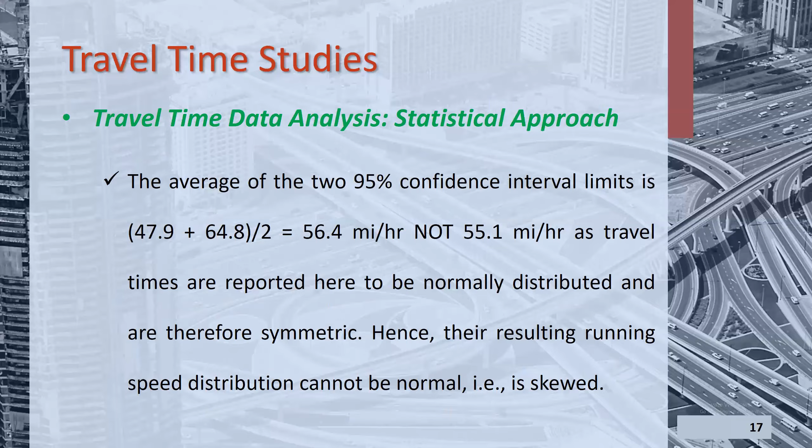So we have already finished travel time study. Today we'll be starting with delay. So what is delay? Delay is a portion of the total travel time that is particularly not liked by the traveler.

When you are traveling, you actually don't find it bothering. But whenever you have to stop, you feel annoyance, and that part is called delay. Delay actually has very high importance in transportation planning.

For example, if you want to go from A to B using route 1, maybe route 1 takes 40 minutes, and there's route 2 which takes 30 minutes. But in case of route 1, you don't have to stop, you can go very smoothly. In case of route 2, it takes around 30 minutes, but maybe the actual travel time is like 10 minutes, and 20 minutes is actually spent on delay.

Many times you will see people traveling using route 1, because that gives them an uninterrupted travel. Even in my case, traveling from IUT to Uttara has become better now. But previously, when construction works were going on, many times I used to take the route through Kamarpara, then come to Uttara sector 10, and that way I used to come up to the airport.

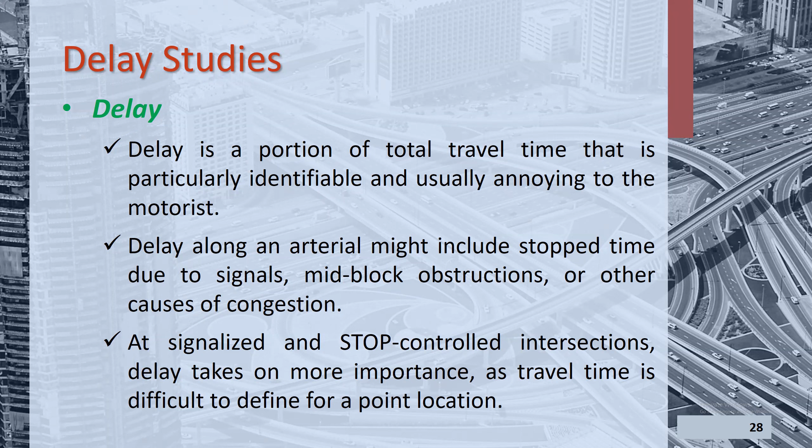So at signalized and stop control intersections, delay takes on more importance, as travel time is difficult to define for a point location. In general, when we do the travel time study, it's for the network or for a long corridor. Delay is actually at a specific point, which is why it's very important to identify the points where we are losing a lot of time.

In case of intersection delay, the other kinds of delays are either easier or very difficult to solve. For example, if you have very high demand and the delay is because of that, the solution is not easy - you have to do a massive investment for that. Or if it's because of illegal parking or something like that, you can easily solve it. But there's one delay which definitely you can do something about, and that is called intersection delay.

Be it because there's a stop sign or because there's a signal - when we talk about intersection delay, there are many different definitions. In old ages, we used to use one definition; these days we are using some other definitions. So let's go through all those delay definitions. The first one is stopped time delay.

This is actually the most common one that used to be used say like 2-3 decades back, and it is the easiest to calculate. You just calculate the amount of time the vehicles are remaining completely standstill because of intersection has signal or intersection has a stop sign. But these days we don't really use this one, but this is the easiest to measure.

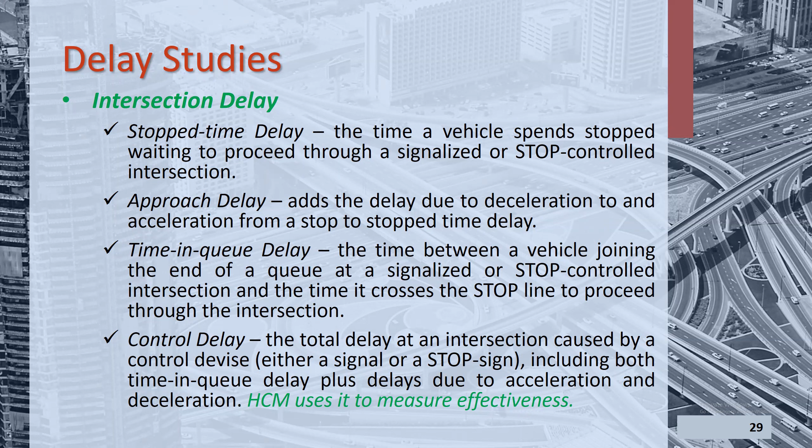Every time the way we start is like, first we learn the definition, then we learn why we need it. I think we have covered these two points. The third thing is how do we design the survey to actually collect this data, and the fourth one is how we analyze and interpret the result. So let's move on to the remaining two parts.

That was intersection delay, and now we also have delay along the route, which is easier to resolve. It is the difference between the actual travel time traversing a section of highway and the driver's expected or desired travel time. So if there is no traffic, if you directly drive, how many minutes do you need? And then when there is traffic, how many minutes do you need? The difference is actually your travel time delay along the route.

So along the route, there can be intersections, so you have to calculate the intersection delay and the delay not caused by intersection separately. And when you add all those things together, you actually get the delay along the route. And you also have it recorded because you have the overall travel time to traverse that section.

So normally delay calculation methodology is loosely defined. When we are collecting data, except for intersection data, when we are collecting data for travel time study, from that we actually can gather the information regarding delay as well. And it is seldom used for assessing congestion along a highway segment. Some types of delays are measured as part of travel time study, as we have explained before, by noting the location and duration of stop periods during a test run. So then we can clearly understand where are the locations we are losing time and how much time we are losing. While speeds are generally studied at a point under consideration of free flow, travel time and delay are generally studied along sections of roadway under congested conditions. We have also discussed this issue during our last lecture.

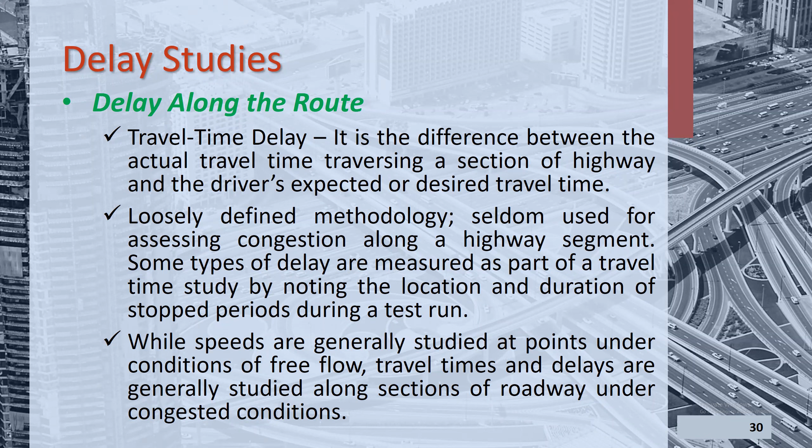When calculating delay along the route, before 1997, stopped delay used to be the most preferred measure. But as I've told you, for the last 3 decades we are not using it anymore, at least in situations when we have more information.

Now, total control delay, defined as the time in queue delay plus time lost due to deceleration from and acceleration to the ambient speed, is these days used and recommended by the Highway Capacity Manual. Total control delay methodology is based on direct observation of vehicles in queue at frequent intervals and requires a minimum of 2 observers. We will see how we can distribute the responsibilities of these 2 observers.

Before we move into how to collect data or design a survey for intersection delay calculation, we need to know one more term called saturation flow rate. Why do we need to learn this term? Because the intersection delay methodology we will study now can only be applied when the intersection has not reached its saturation flow rate. When it's lower than that, we can do this study. If it is at that level, we cannot do this study anymore.

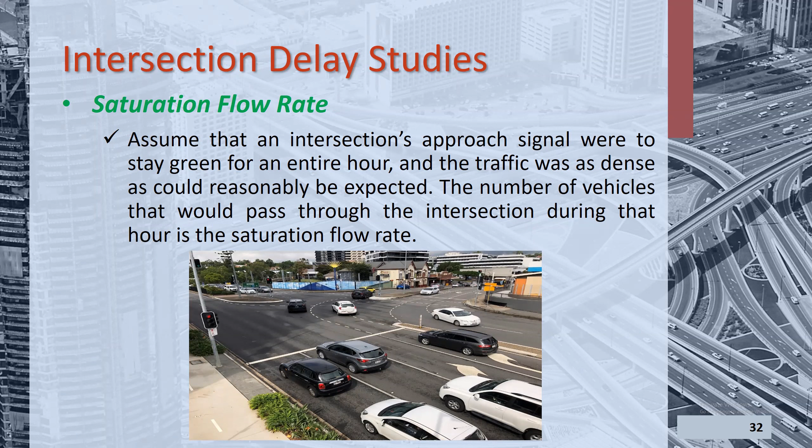Saturation flow rate is more like a capacity kind of thing. So when there is no control at an intersection and you have very high volume operating there, the maximum number of vehicles that can pass that intersection is actually your saturation flow rate. Normally when the intersection reaches saturation flow rate, we actually don't do delay study anymore. It has to be done before that.

Some important points when calculating total control delay: it is intended for unsaturated flow conditions, and for cases where maximum queue is about 20 to 25 vehicles. If you have a queue over 20 to 25 vehicle lengths, then again you cannot do this intersection delay study. It means the intersection is already in bad shape.

The method does not directly measure acceleration and deceleration, but we have to account for them, right? So you will see there are some empirical charts and terminologies that we multiply with the value we've calculated, or we add some extra values to it. That's the way we actually accommodate the acceleration and deceleration delay.

We also need to know the free flow speed at the beginning of the detailed survey. How can you do it? You can just drive through that intersection, assuming during a green signal when traffic is not heavy, or if it's a stop control, find a space when there's no vehicle in the intersection and just drive through. That is your free flow speed, and you have to take that data because we will use it in the calculation of total control delay.

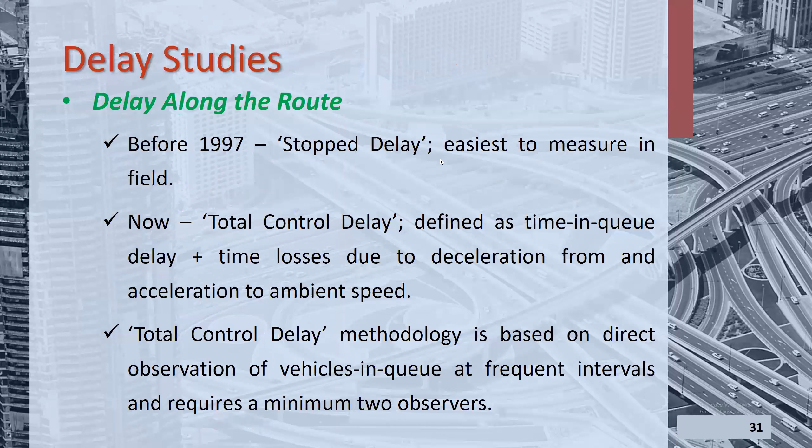Then survey count interval, like every X seconds you enter the data. Remember for our traffic volume count, it was every 5 minutes or 15 minutes. So here also you write it down, normally in seconds. Cycle length is from one red to another red - how much time we allocate. That is called cycle length.

Stopped vehicle count: how many vehicles have stopped. If it stops multiple times, you count it only once. So how many vehicles have encountered this intersection and stopped at least once - that's the V stop. And then VT is how many vehicles have arrived so far at the intersection.

Now we have the clock time - say, for example, 8:30, 8:31, 8:32, something like that. And cycle number is like one red to another red - one cycle can span several minutes. So you write down the cycle numbers, and even those cycle numbers you divide into smaller parts, like every 10 or 15 seconds.

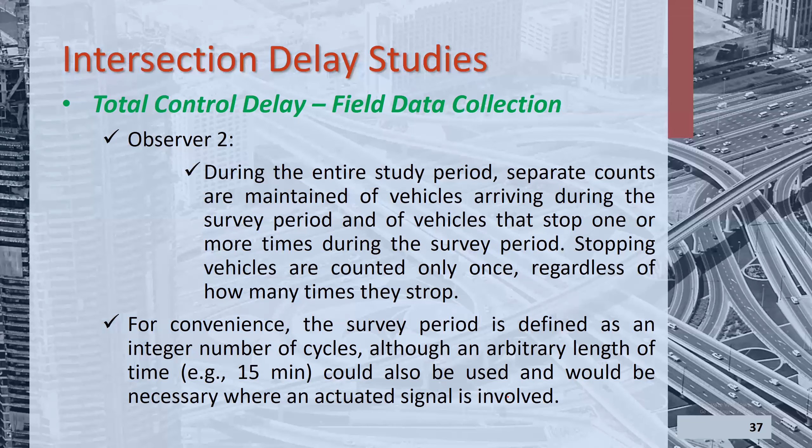Observer 2 separately keeps counting the number of vehicles arriving and the total number of stopped vehicles. So these are the works of observer 2. Sometimes you may need more than one observer for observer 1's work, but observer 2's task should be fairly simple for one person.

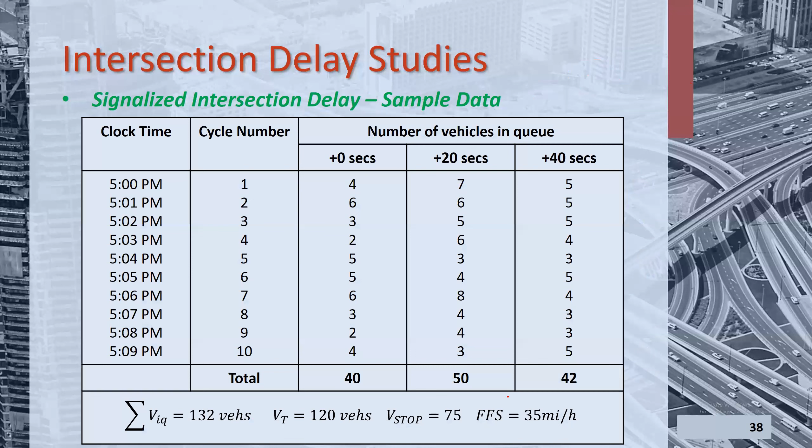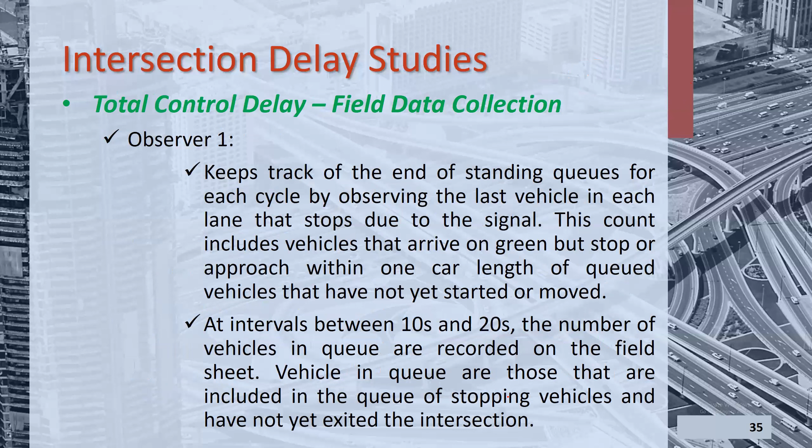Now you fill it up this way. Now, how to calculate the average time - total intersection delay. First, you calculate average time in queue, TQ, measured as IS. IS you already know, the count interval. Here, if it is 1 minute and 10 divisions, so it's 6 seconds. In our case, it is like 20 seconds.

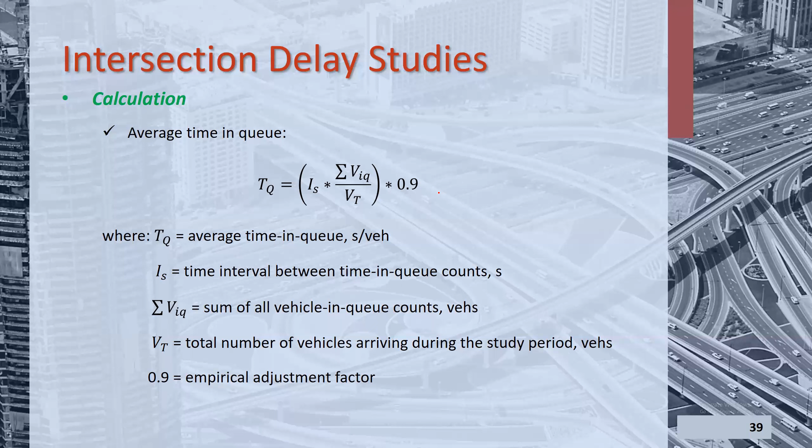Summation of VIQ, you already know, VT you know, and you multiply it with 0.9. Why do we multiply it with 0.9? Because in many cases we have seen the VIQ value becomes very big and we actually overestimate the time someone spends in the queue. So that's why we multiply it with 0.9. So you can calculate TQ from this.

But then we need to calculate two more things. One is called VSLC, which is the number of vehicles stopped per lane per cycle length. NC is total number of cycles - in this place, we have 10 cycles, so NC is 10. NL is number of lanes - you will know whether you have 2 lanes or 3 lanes or 1 lane.

And V-stop is the total number of vehicles that stopped at least once. But if it stops multiple times, we still count it as one. So from that, we can easily calculate VSLC.

And FVS is actually fraction of vehicles stopping - other variables as previous, stopping. So total VT is the total number of vehicles that have arrived, and V-stop is the total number of vehicles that have stopped at least once. So we get the fraction of vehicles that actually have to stop.

And using that, if you know the free flow speed and vehicle stopping per lane per cycle, you can actually get a number like this. And you will see how we use it for the calculation of the total delay.

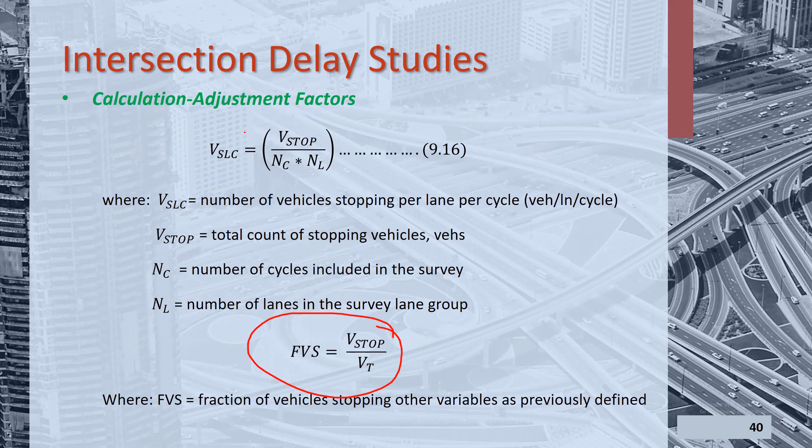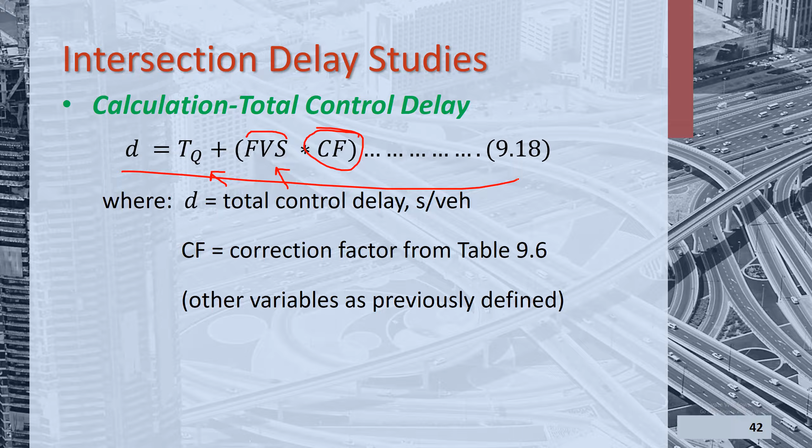Yes sir. So now we will move to the next part.

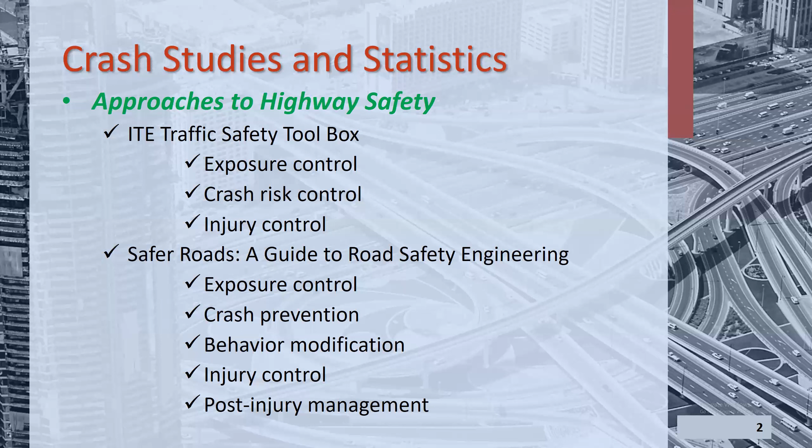Now crash risk control is divided into two parts in the Safer Roads guideline. One is crash prevention - you want to prevent as many crashes as possible by modifying the behavior of people, because most of the time crashes happen due to attitude, behavior, knowledge about safety, reckless driving habits, drunk driving, not following rules, or not using seat belts. So behavior modification is also an important factor.

So now the purpose of crash data collection. First we have learned the two guidelines we follow to control or reduce the impact of crashes. Now, second thing is, why do we need to collect crash data?

We need to collect crash data to identify locations where usually a high number of crashes occur - we call them hotspots or black spots. If we don't have the data, how can we understand whether a lot of crashes are happening in a place or not, and whether it is actually significantly more than crashes happening in other parts of the network? We will answer these questions as we move on in today's lecture.

The second point is detailed functional evaluation of high crash locations to determine contributing causes of crashes. If we have crash data, we can identify where many crashes are happening, and also understand why these crashes are happening - what are the contributing factors.

Third is development of general statistical measures of various crash-related factors to give insight into general trends, common causal factors, driver profiles, and others. For example, whether crashes are increasing or decreasing, or if it has any relationship with changes we have made, what are the most common causes of crashes, and what kinds of drivers are most commonly involved.

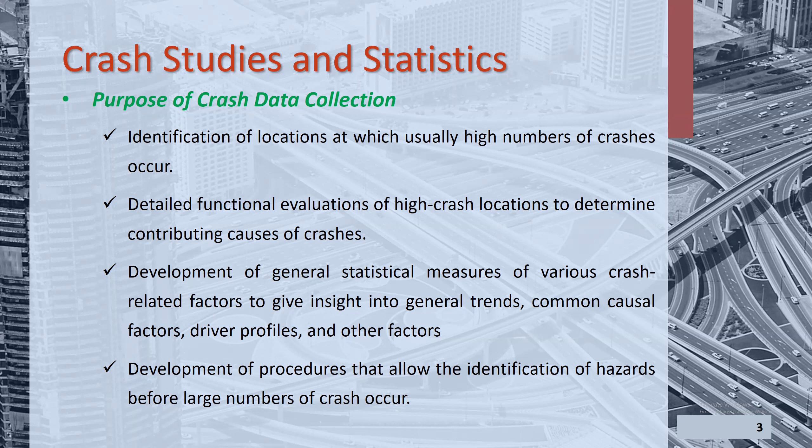So when you design something new, you can take care of those issues so that your new design doesn't come up with the same problems. Or you can check the design of existing roads, we call it road safety auditing, and actually improve things. So these are the 4 reasons why we need to collect crash data. Do you understand why we collect crash data? And I believe you also understand the philosophy of the 2 guidelines.

Now, how will you know that a crash has happened? This is one of the most important questions. The first one is motorists' crash reports. If someone is traveling on the road and sees a crash happening, they can report it. In our case, we have 999. If someone sees a crash, they can report it through 999. This is filled by each involved motorist in the road crash, required for all crashes with injuries, fatalities, or property damage exceeding a prescribed limit. So normally we expect that whenever someone sees a crash, that person will report it, in our case to 999.

Another thing is when police get notified, either through motorists or someone else calling, then police need to go to the site and fill up a detailed form. In Bangladesh, we call it ARF, Accident Reporting Form, and it has 54 pieces of information. That's why most of the time they don't really fill it up. It's normally filled up by an attending police officer for all crashes at which an officer is present. Whenever a police officer is present and sees a crash, that must be noted. Or if they get notified of a fatal crash or serious injuries where emergency vehicles had to be sent, or a lot of property got damaged, then police must go to those places and collect those reports.

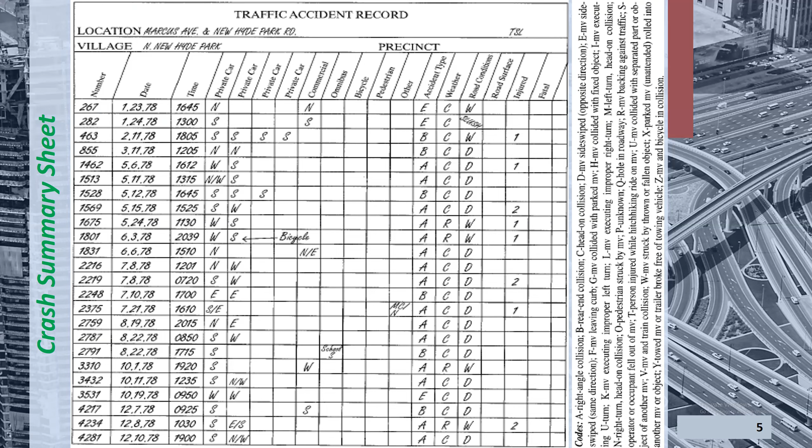Now we clearly understand that it cannot be something paper-based. These days we have software in which we can keep this data. For example, there are two very popular software for these things: one is called iMAAP, and another is called Driver. IMAP is a commercial off-the-shelf solution, COTS - you have to buy it from a company. If you want to learn more, you can search IMAP, it's made by TRL software. I gave them a lot of suggestions on how this software should be constructed, and I am responsible for implementing IMAP in the Dhaka-Sylhet corridor for a project that IUT is doing, so I am directly and heavily involved in it. The Bangladesh government is buying this software to collect crash data on the Dhaka-Sylhet corridor, and is planning to procure a crash data management system for the whole network within the next 3 years.

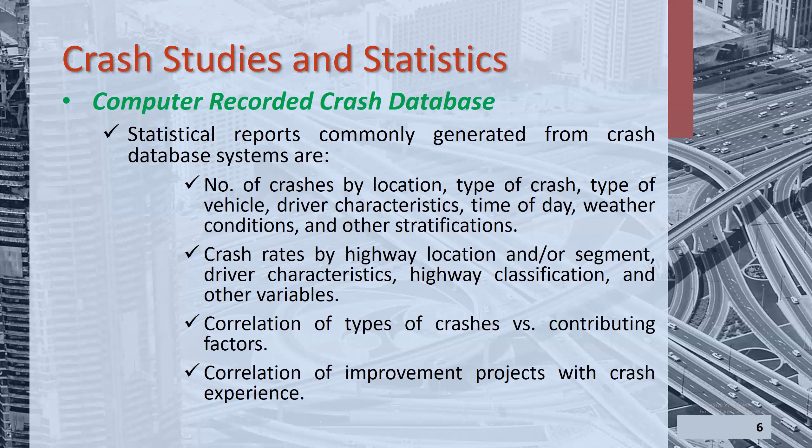Correlation of improvement projects with crash experience. If we have the crash database and we've improved some things in the road, and after that the crash database is suggesting the situation has improved or gone worse, we can actually relate project with crashes - these kinds of projects will increase crashes, these kinds of projects will reduce crashes, something like that. And the types of statistics that we generate can be divided into three parts.

One is crash occurrence - numbers and types of crashes that occur, which are often described in terms of rates, for example population or vehicle miles traveled. We'll look into this within a very few slides. Then crash involvement - number and types of vehicles or drivers involved, which we can also represent with population or various other kinds of indicators.

Then crash severity. So one is crash occurrence, whether a crash has occurred or not. Second is crash involvement, what type of crashes, what vehicles were involved. And third is severity - how many people died, how many people got seriously injured, things like this.

Now, common types of crash analysis - the kinds of reports we generate regularly. One is trend over time, whether the number of crashes is increasing or decreasing. Stratification by highway type and geometric element - for example, divided highway, undivided highway. Then functional class - national highway, regional highway, or paved highway, unpaved highway.

Stratification by driver characteristics - whether male or female drivers are having more crashes, what particular age group is heavily involved in crashes. We can sometimes see a lot of illegal drivers, or old people having a lot of accidents, or very young people at the early ages of their driving having a lot of accidents. We can identify these trends and then do something about it.

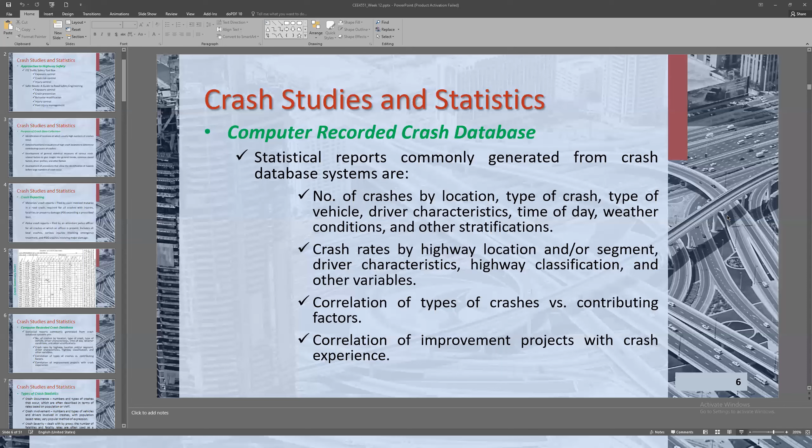Actually, there is something called IRAP, International Road Assessment Program. After your undergraduation is complete, you can go there, take a training and get accredited, and then you will get a certificate of IRAP. For the next 1 year, you can actually rate the roads, whether this road is safe or unsafe - it's called star rating. 5-star road, 3-star road, 2-star road.

Normally our target is to make all the roads at least 3-star, all the national highways at least 3-star. So there you can see, if you change the weather condition, if you change the geometric condition, the crash risk increases or decreases for different roads.

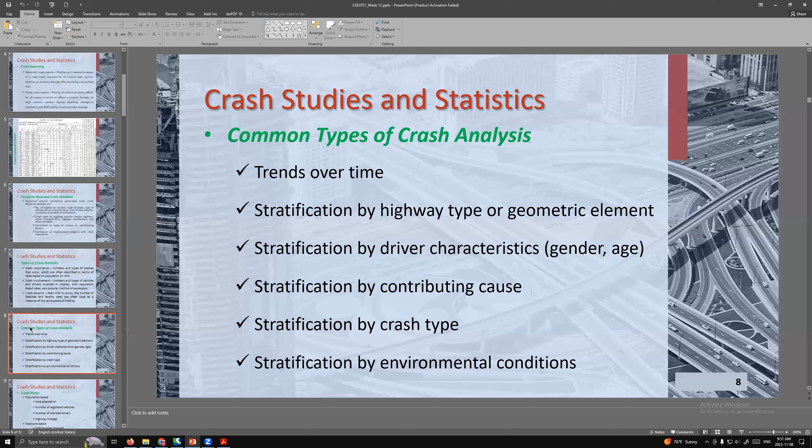So up to now, do you have any questions from the first 7 slides?

No questions? Okay, then now you will be doing some mathematics, like calculating the crash rate. You can do the calculation based on two things. One is called population based, another one is called exposure based.

Exposure based is always a better option because as much as you get exposed, your crash risk increases. If you stay for a long time on the road, then your crash risk will increase. If you travel a lot of kilometers, then your crash risk will increase. So this is exposure based.

Population based is more like static: area population, number of registered vehicles, number of licensed drivers, highway mileage. Even if you have a lot of registered vehicles, if people don't drive but still have a lot of accidents, actually the rate will be low, but it's a very dangerous situation, right?

If you have a huge population like Bangladesh, but we don't have a lot of roads or vehicles, we may not have a lot of accidents happening compared to a developed country. So population wise, it will look small. But actually, if you see, we drive very little, we have very few roads, but still we have so many accidents. So population based will say it's not a serious case, but exposure based will say it is actually serious. That's why exposure based crash rates are more acceptable, but it is obviously harder to obtain.

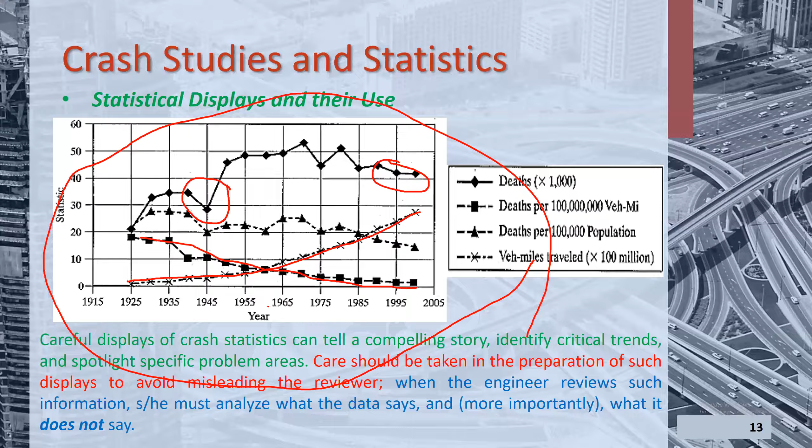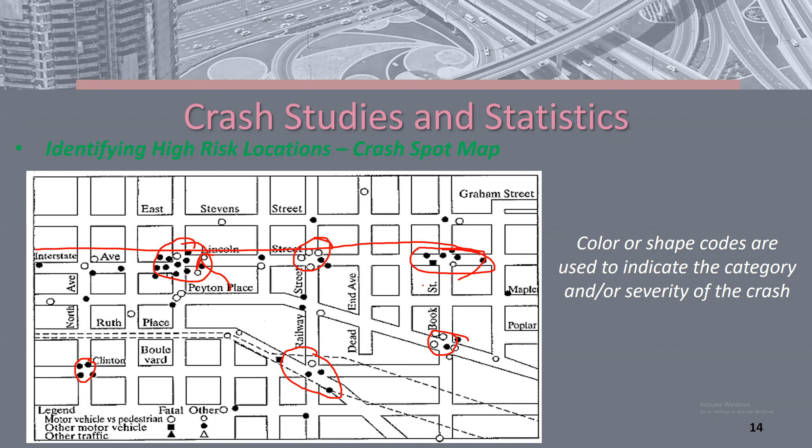So we actually can identify the hotspots. I'll be going to these 1, 2, 3, 4, 5, 6 sites and seeing why these accidents are happening. Particularly this one, I definitely need to go, and this one as well, not this one, maybe. This one is also very dangerous because of lots of vehicle versus pedestrian incidents. So something has to be improved throughout this corridor. We can clearly see.

How can you say that this location is high crash risk? Again, statistics comes in. You have to find a way to show this location is significantly more accident-prone compared to other parts of the network, and to do that we use statistical tests.

What we do is calculate the Z value. X1 is the accident rate at the location under consideration, meaning this location has significantly more crashes than others. We calculate X1, the number of accidents at that location, minus X bar, the average number of accidents at other 4-leg intersections, divided by the standard deviation of accidents at those other intersections.

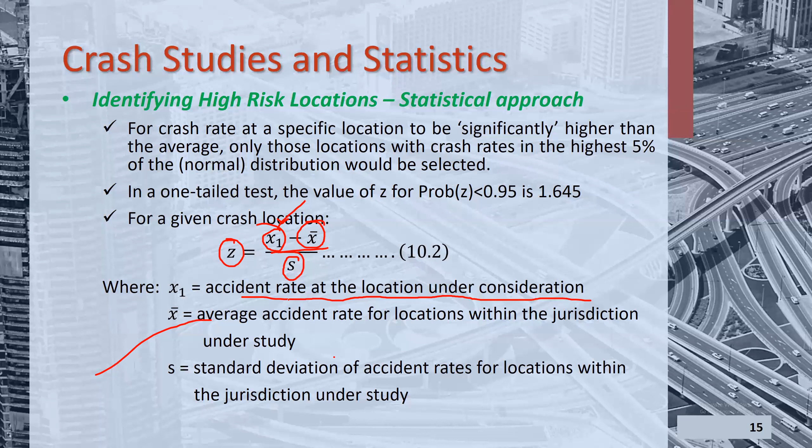From the Z value, we can say the minimum crash rate considered significantly higher than average is found by multiplying 1.645 by the standard deviation and adding the average. If this value is smaller than the observed rate, X1 can be termed a high-risk location.

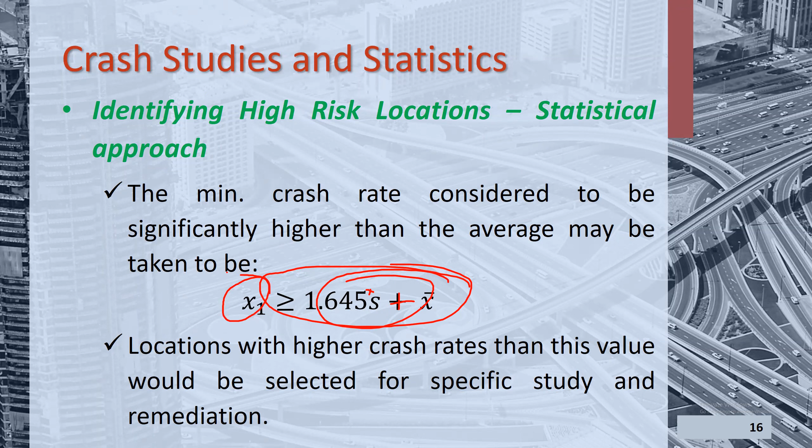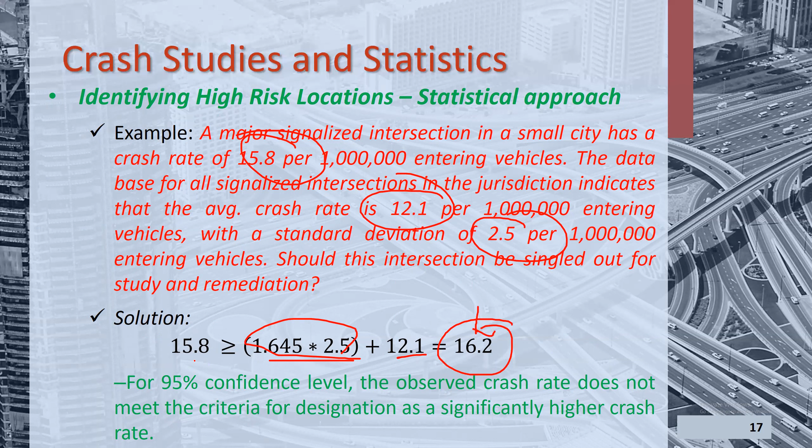In this example, the location has 15.8 crashes, with a given average and standard deviation. Average plus standard deviation gives us a threshold, but this one is actually bigger, so we cannot say this location is very crash-prone compared to others in this site. So you first identify places more crash-prone than average, then investigate further why crashes are happening there, and then do something about it.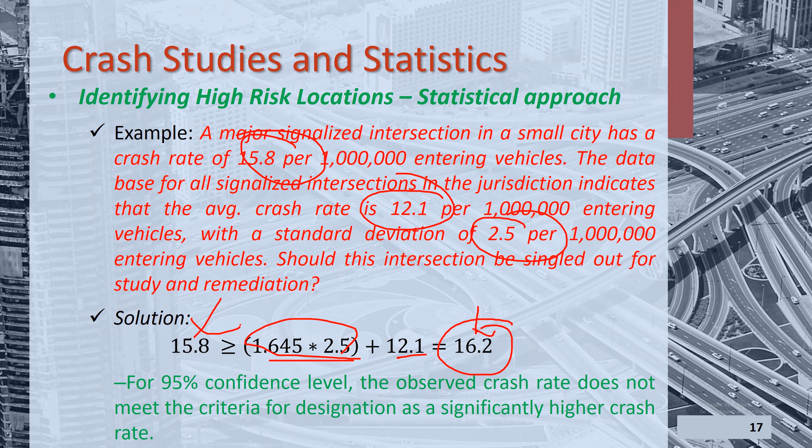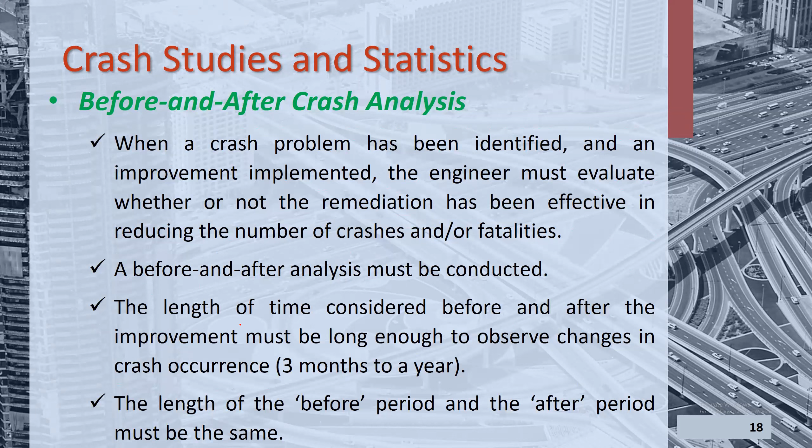Another important thing we can do after identifying high-crash locations is before-after analysis. We implement some improvement, give it time, say 3 months, for people to adjust to the new system, then collect crash data again for the same period. We compare whether the change is positive or negative, and whether it's significant. To do that, we use a chart like this.

This is before-after crash analysis. But if the number of crashes is too small, we cannot use the normal approximation, and we have to use either Poisson distribution or binomial tests instead.

For example, before the project we had 10 accidents at that location, and after the project we see a 40% reduction in crashes. So you go here and come here, then take this line extended to see where it cuts this decrease. If this value is higher than that one, the change is not significant.

If this value is lower, as it is here, it means that although we see a 40% reduction in crashes, we're not so happy - it's not a significant decrease. But if it had decreased 90% or 80%, the point would be somewhere here, higher than the threshold, and you could say the change is significant.

But a flaw with this method is it assumes the crash reduction was due to the project, when it could be for other reasons. For example, during COVID nobody was driving, so you'd see a reduction even though you did nothing. So I have to relate it to the circumstances in that area.

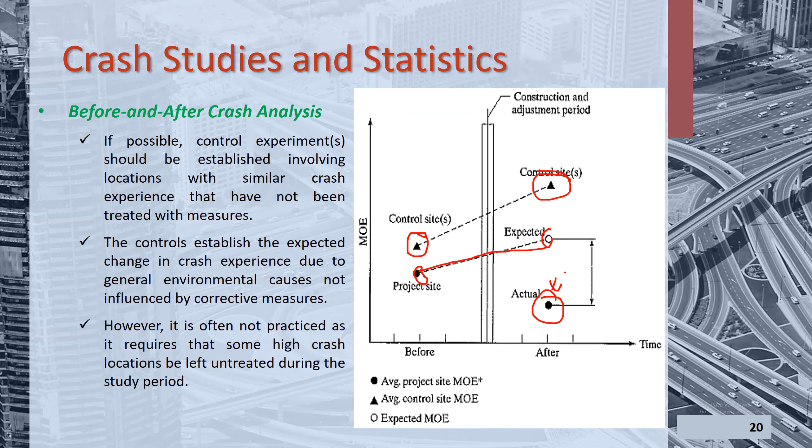So, do you have any questions? Any questions so far?

স্যার, পেজ ১৯ এ যদি একটু যাইতেন। স্যার এখানে যে ১০ মানে বিফোর কাউন্ট ১০টা, কিভাবে বুঝলেন এটা?

একটা সাইট সম্পর্কে অনেক অভিযোগ পাইছি। আমরা ৩ মাস ধরে ডাটা কালেক্ট করেছি কতগুলো অ্যাক্সিডেন্ট হয়। আমরা দেখলাম ১০টা অ্যাক্সিডেন্ট হয়েছে। তারপর কারণ খুঁজে বের করলাম, এই কারণে অ্যাক্সিডেন্ট হয়। তারপর একটা প্রজেক্ট ডিজাইন করলাম, সলিউশন দিলাম। সলিউশন দেওয়ার পরে সপ্তাহখানেক ওয়েট করলাম, লোকজন অভ্যস্ত হয়ে গেল। তারপর আবার ৩ মাস ধরে ডাটা কালেক্ট করলাম, দেখলাম এবার ৬টা অ্যাক্সিডেন্ট হয়েছে। তার মানে ৪০% রিডাকশন। বুঝে গেছে? জি স্যার, বুঝতে পেরেছি।

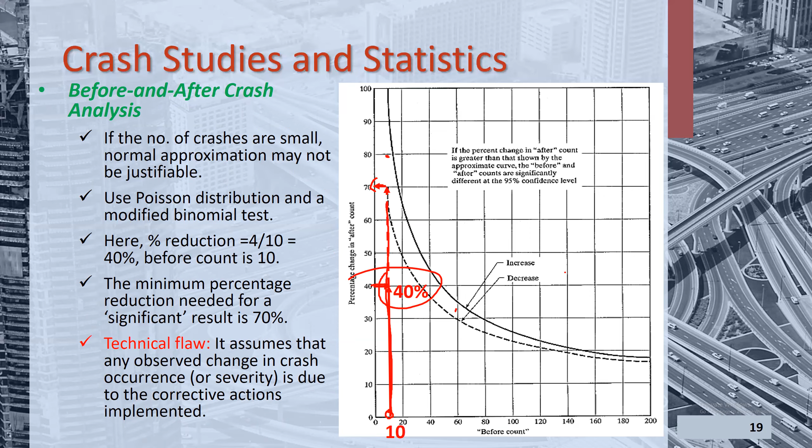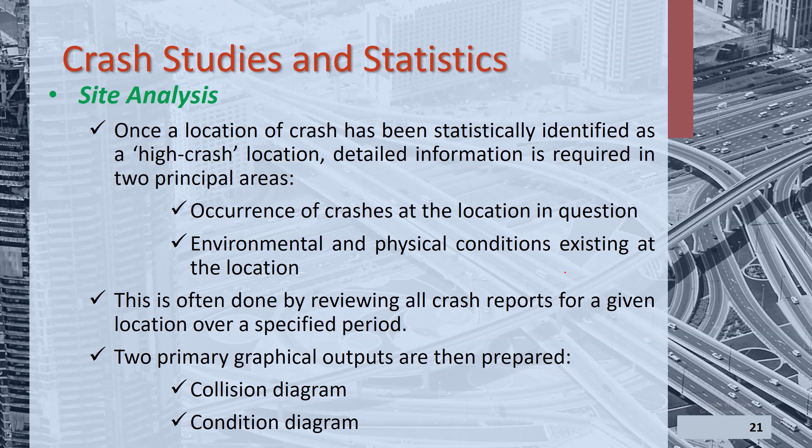So now, when you are sure that these are the locations where you have a lot of accidents and you have to do something about it, you do site analysis. Once a location of crash has been statistically identified as a high crash location, detailed information is required in two principal areas: occurrence of crashes at the location in question—what kind of crashes are happening, at what time, who is involved, what vehicles are involved—and then the environmental and physical condition of the existing location. This is often done by reviewing all crash reports for a given location over a specified period. You keep reading the crash files from the police, and then you draw two diagrams: one is called a collision diagram, another is called a condition diagram. Collision diagrams can be drawn this way.

A passenger car you represent as this symbol, a truck as this, a bus as this—these are the vehicle type symbols. This is the accident type: this means rear end, this means head on, this means right angle. Then if you add this, it incorporates traffic movement. This is severity. And after that, you prepare a diagram like this.

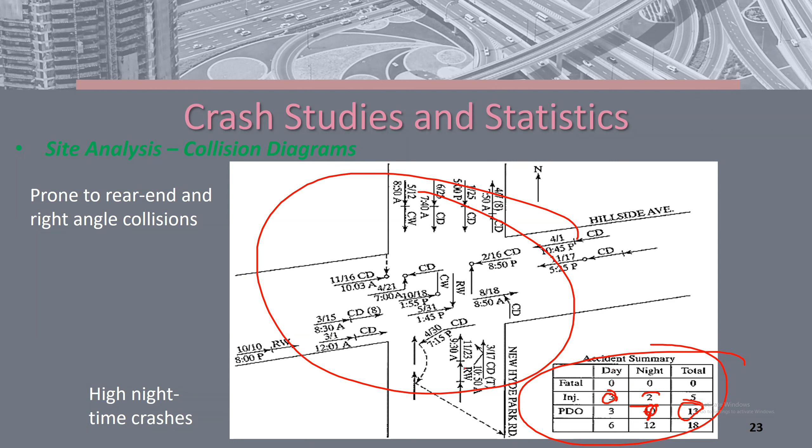From that you can see, say here you have some data. You can clearly see lots of accidents during nighttime, lots of injury. Fatality doesn't happen, but during daytime people get more injured. Nighttime is mainly property damage only. So you get some ideas about high nighttime crashes, and from here you can see this is rear end, rear end, rear end—rear end crashes are most common. So you get an idea about what kinds of accidents are happening.

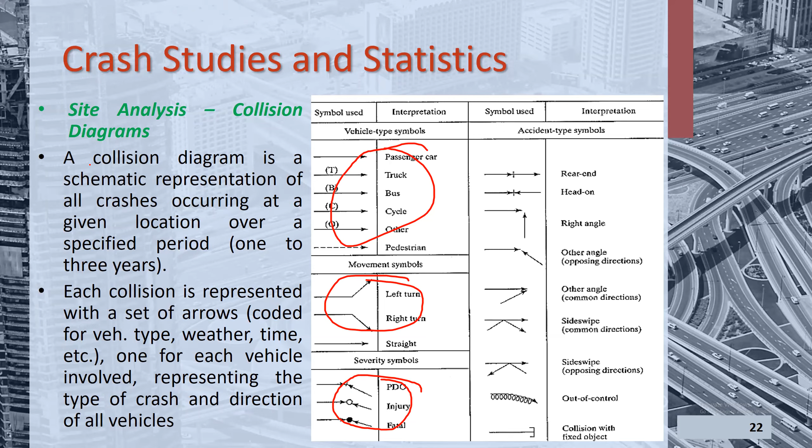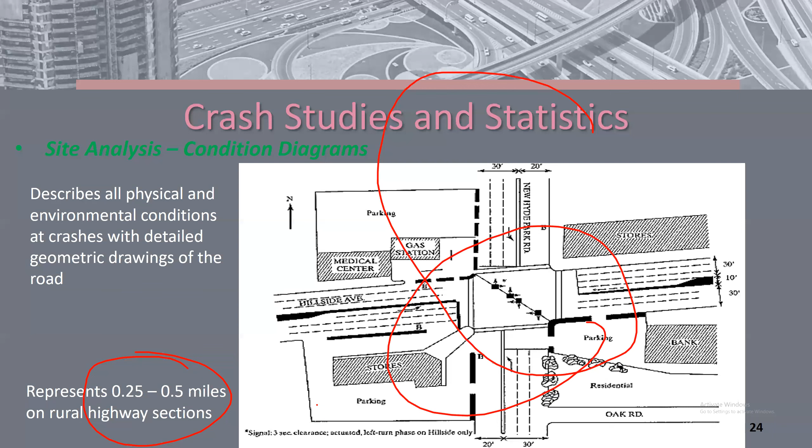And then you can also create something called a condition diagram. You put the geometry, the land use, and everything. Now you try to relate a lot of these accidents happening at this time—the land use is like this—so why are those accidents happening? And then you start getting ideas about the causes, and you can design the interventions. Normally these diagrams cover around 0.25 to half a mile.

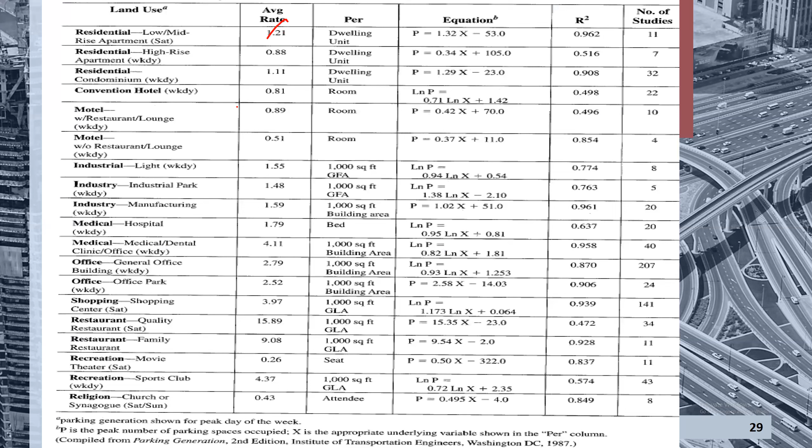From different studies we can come up with different rates - these are the rates and these are the equations. If you put the equation value for X, like number of dwelling units or something similar, you'll see that the value from the rate and the value from the equation may not match. That's what they mean when they say rates and equations may not give the same results. So for every city in general, these equations and relationships are developed specifically.

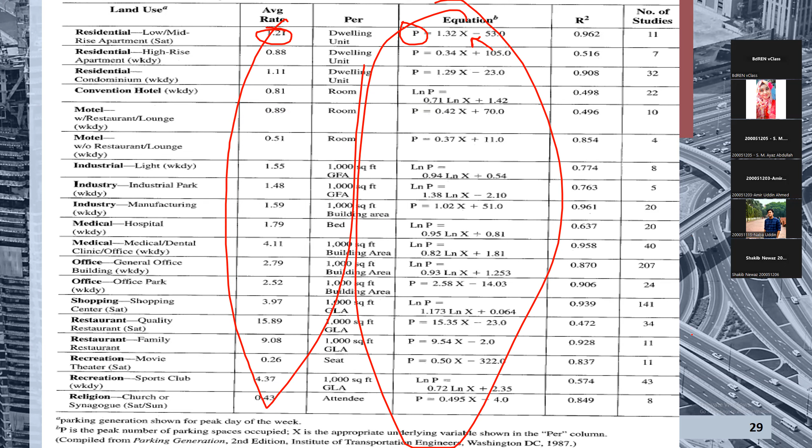In Bangladesh, we don't really have these kinds of well-structured parking guidelines. Here is a summary of how many studies have suggested that this equation works. This is actually for developed countries, and it's a very simple way of calculating parking demand.

Just like traffic on road, here also you have peak demand, and you have to design it for the peak hour. So the peak demand formula is N K P R divided by O. N is equal to size of activity measured in appropriate area, the floor area. K is the proportion of destinations that occur at any one time.

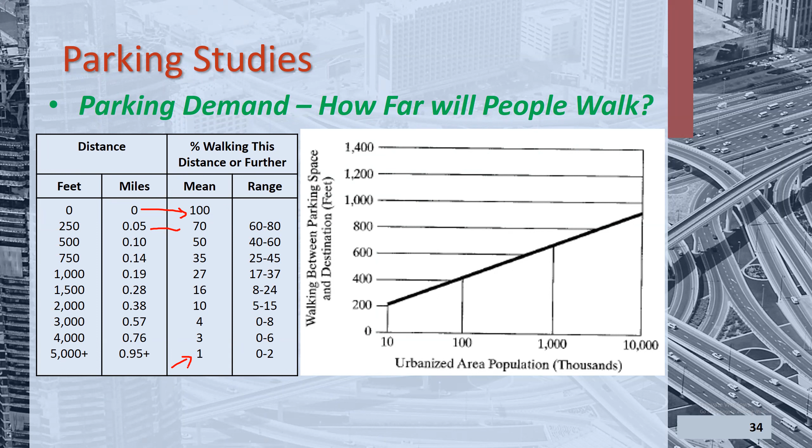Because if you want to design a parking lot abroad, actually parking lots are also commercial. You can have multi-storied parking lots. So you have to take care of the land use. If it is not very close to the land use, your demand will be low for that parking lot. So this is a relationship between walking and parking demand. How far would you like to park your vehicle and walk to access a facility? This is very important for us.

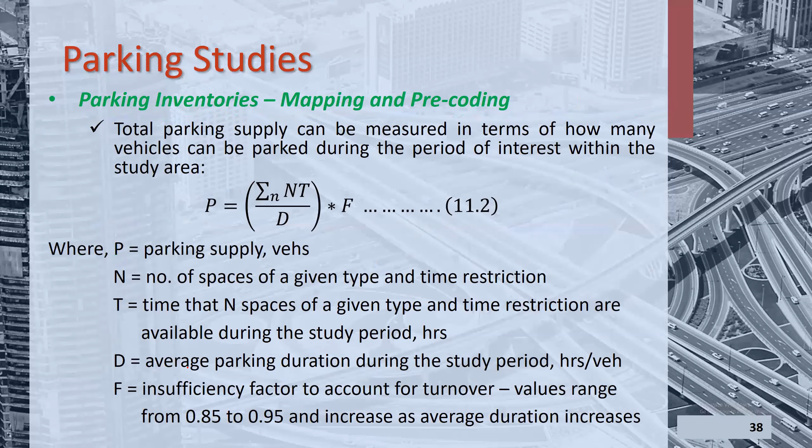And with this, we will end today. Next day, we will do some data collection study, and with that we will end the parking study. This will finish almost all the topics we were supposed to cover in this course, except for signal. The next 2 lectures will be on signal, and the final lecture will be a review. Our other faculty member, who has already taken 1 lecture before the midterm, will take the final class, but it will be more like a review. But that is also on demand - if you need it to be more than 1 class, he will arrange that for you.